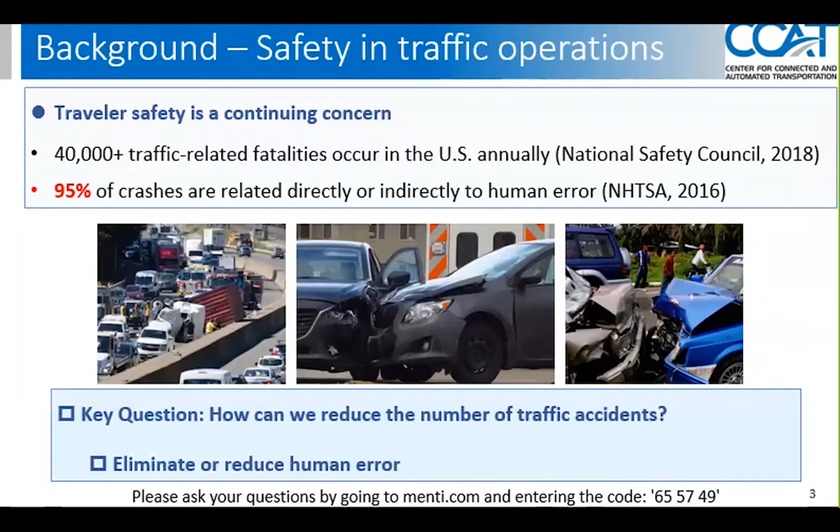Now, the question is, how do we reduce the number of crashes, or at least reduce their intensity? Well, just like I said, we can eliminate or reduce the errors that human beings make. That's one way. And if you're able to do this, then we are gearing towards something we call Vision Zero, an international initiative geared towards elimination of crashes. Some see it as a utopian goal, but at least it's a goal we can all work towards. And automation offers probably the most promising path towards Vision Zero.

Now, if I may expand a little bit on the mistakes that humans make, the causes of these mistakes are overconfidence. Many of us feel that we are good drivers, whereas we are not often as good as we think. We also have problems of distractions, especially among the youth - texting, music, and all that. Fatigue - sometimes we're just tired and we lose concentration. In some cases, it's driving under the influence of some substance or medication, and sometimes it's just slow reaction times, which again may be due to some human feelings or tiredness or some other reason. These are things that are difficult to avoid or reduce, but ultimately they translate into crashes.

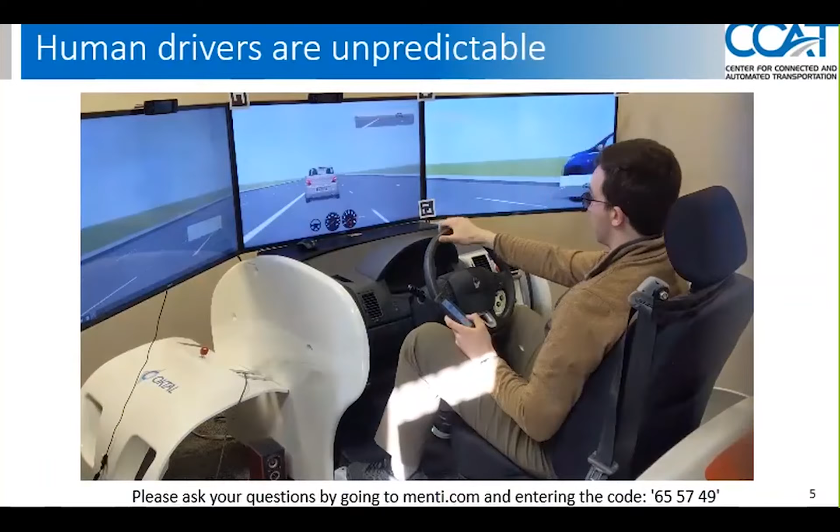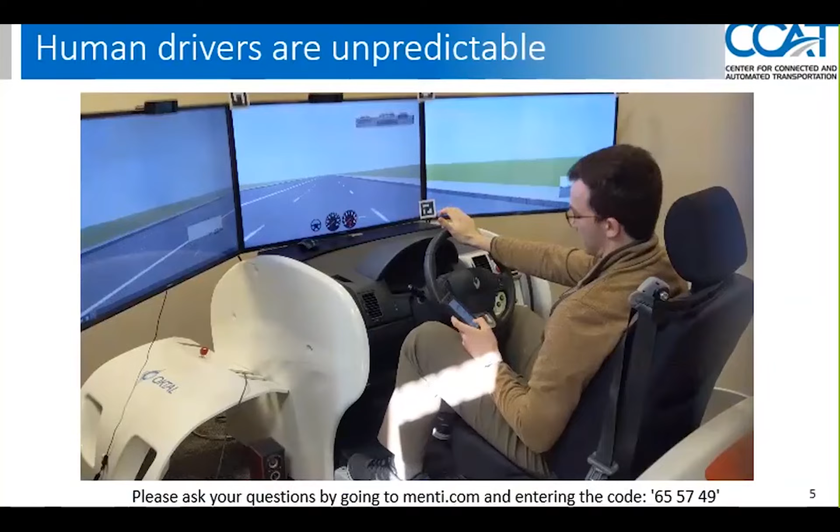But what you will see in the video, you will see an autonomous vehicle, a red car, that shares the traffic space with other vehicles. You will notice that the human-driven vehicle, the yellow car, suddenly enters the lane in front of the AV. It cuts in, and the AV decelerates in order to avoid rear-ending the HDV. But in doing so, the AV itself is rear-ended by the immediate following vehicle behind it. So this short video exemplifies a potential situation where two crash patterns could be experienced: side impact or side swipe, and the rear end.

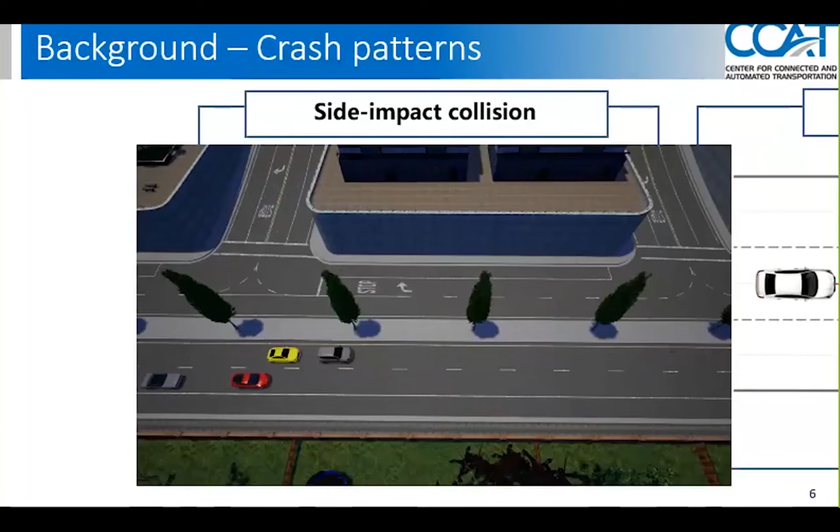So let's play the video. It's a very short clip, just a few seconds. So just play it and let's see. Yes, right there. So we are just playing it over and over again, so you can register the point. Okay, I think that's enough. Okay, so next slide.

Okay, so next, yes. So this is the second video, right? Okay, so I think the point is made.

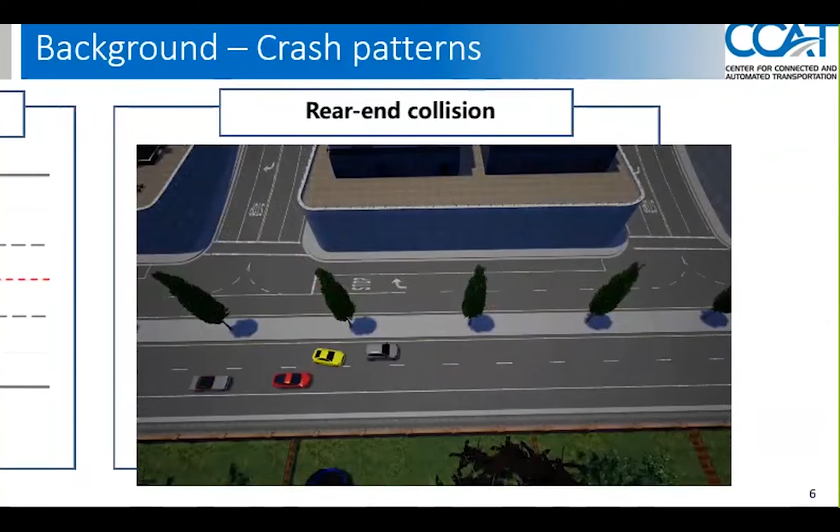Okay, so these short videos remind us of the potential traffic safety hazard, the risks that await us in the transition period, in the transition phase of AVs, where both the AVs and the HDVs, HDV meaning human-driven vehicle, share the traffic space, until a time when we have 100% market penetration. Well, it is not certain when we shall achieve that 100% market penetration. It's not even certain when we shall even start the AVs.

The AV sunrise, yes. Of course, we have AVs right now on test tracks and restricted environments and all that, but we're not really sure when it's going to be open for public use. It's possible that the start year may be different for different corridors or road classes, not the entire network at a time. So that's a possibility. But whatever the case, where we have mixed traffic, we'll have to contend with that heterogeneity of AVs and HDVs and their sibling rivalries and interactions. That's something we have to contend with.

So this will mean that the algorithms in the AV controller will need to be designed to make the AV proactive, very proactive, to mitigate the mistakes that the HDV drivers make and the bad habits of the surrounding HDVs in the vicinity. So this is a primary motivation of our research.

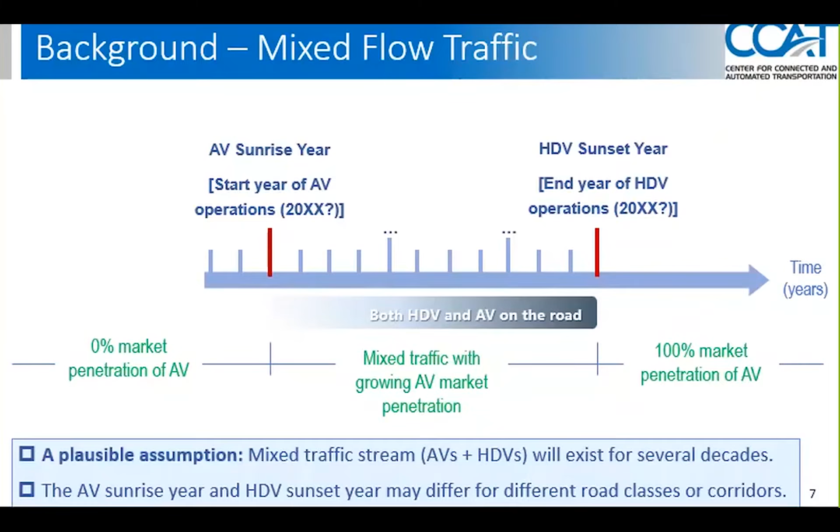Okay, thank you, Dr. Labi, for introducing our project background. As Dr. Labi mentioned, in the first few decades of autonomous vehicle deployment, there will be a mixed traffic of autonomous vehicle and human-driven vehicles on the street at the same time. So this means that human error will still exist in the traffic stream, while autonomous vehicles are indeed expected to reduce the number of crashes. There will still unfortunately be crashes there.

So in the mixed traffic, we believe that there will be two main perspectives of crashes that involve autonomous vehicles. The first one is when the autonomous vehicle is at fault. It's self-explanatory. Reasons like algorithm failure or mechanical issues can cause an autonomous vehicle to perform dangerously, and that may result in a crash. This is also a huge concern for autonomous vehicle developers and manufacturers. So naturally, it receives a lot of attention.

What we want to bring into discussion in this project is perspective 2, where the surrounding human-driven vehicles, or the HDVs, are at fault, but the AVs were unable to avoid the crash. These situations will exist when an autonomous vehicle cannot figure out a way to avoid a crash induced by human drivers.

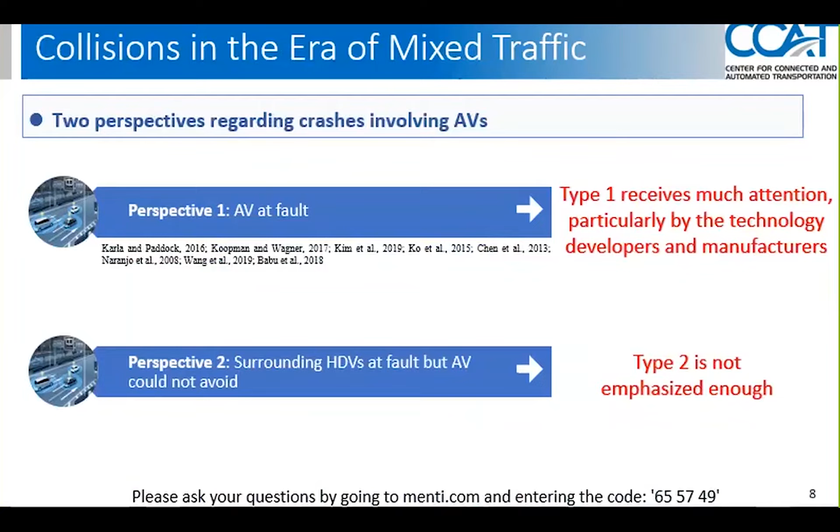In the remainder of this presentation, we will mainly focus on the perspective 2 collision and provide some thoughts on how we are going to address them.

We mentioned previously that emerging technology is expected to improve safety. One such technology is connectivity. To give a broad definition, it is the ability for vehicles to share and receive information from other vehicles and infrastructure. For a human driver sitting in a connected vehicle, connectivity will allow them to receive information regarding unsafe circumstances in advance, even without a clear line of sight.

However, connectivity with human drivers has some limitations. The most important limitation is that it really depends on the driver's compliance. The driver can choose not to do anything with the information, or maybe the driver simply cannot react to the information fast enough.

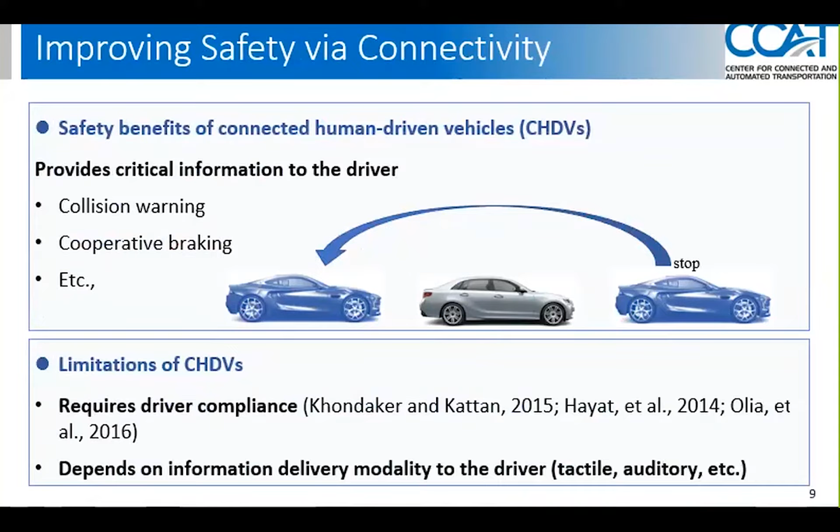Both of these may lead to a crash. Similarly, there could also be limitations regarding information delivery modality. Time-sensitive information, such as information directly related to a potential crash, should be delivered efficiently. Since a driver may also respond to various forms of information modalities in different ways, this difference could also cause some problems, for example, slow reactions.

Another emerging technology that can improve safety is vehicle automation. The effect of automation is quite straightforward. It directly removes human input and the associated human errors from the vehicle.

Engineers and scientists have been developing and enhancing technologies that could outperform human drivers in terms of accuracy, reliability, reaction speed, and so on. This includes advancements in sensor technologies such as LiDAR, radar, camera, and on the algorithm side, computer vision, object recognition, 3D reconstruction, motion planning, and so on in real time. With these technologies, vehicles, in terms of their own driving, will not be subjected to human errors.

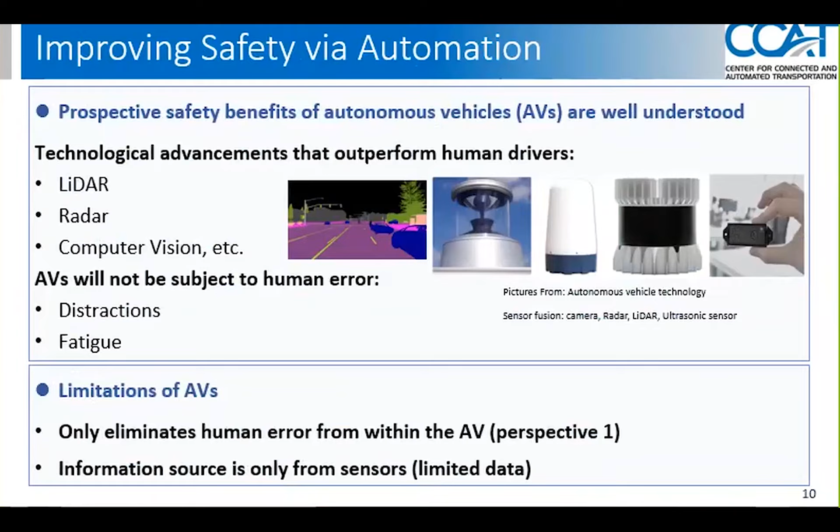But the limitation here is that this only eliminates human error from within the vehicle, as we discussed as perspective one, where the autonomous vehicle is at fault. However, if there is someone who wants to hit you, as we saw in one of the previous videos, where the driver made a sharp lane change without seeing you in his blind spot, there will still be a crash. In addition, if we only use sensors, there will always be data limitations.

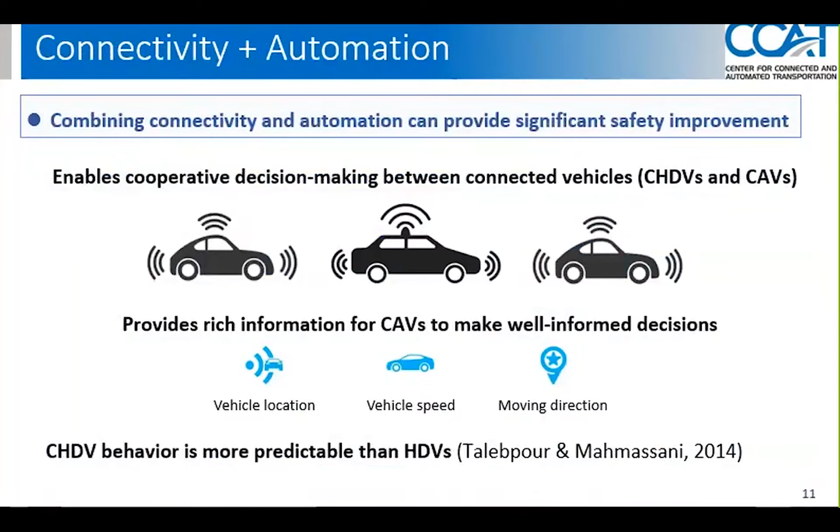Connectivity alone and automation alone have these limitations. We believe a system of CAVs and connected human-driven vehicles can address their limitations. This combination of both connectivity and automation will enable cooperative control between connected vehicles, meaning they will share information among each other and make well-informed cooperative decisions for their benefit as a whole system.

Specifically for roadway safety, since connected human-driven vehicles will be cooperative, the CAV will have more room to make a safe maneuver. If this maneuver is able to help avoid a crash, then everybody in this area will benefit. In order to realize this cooperative control, we will temporarily override the speed control of the surrounding connected and human-driven vehicles in crash-imminent situations.

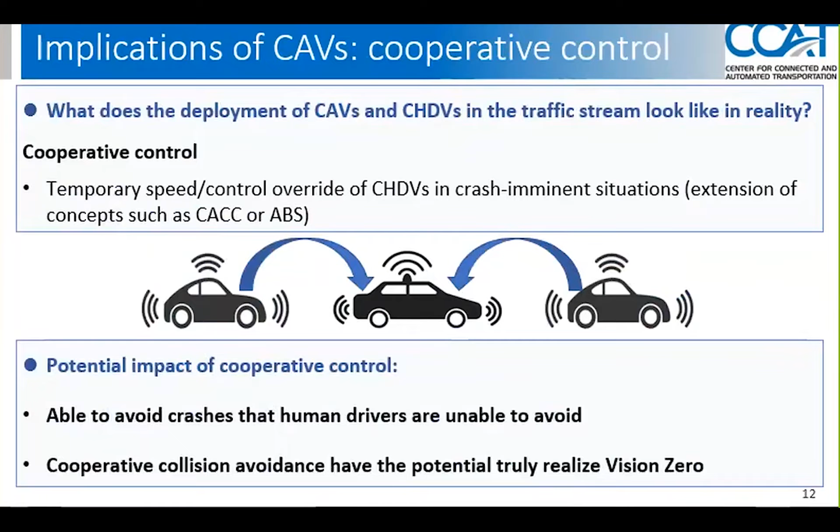This can be considered an extension of some existing concepts, such as cooperative adaptive cruise control, where the drivers do not really need to control their speed. By doing this, we will be able to avoid some crashes that human drivers are unable to avoid right now. So this will help contribute to the goal of Vision Zero, of zero fatalities.

Given the system of control, the purpose of this research project is to design and test approaches for CAVs to avoid crash-imminent situations through the use of both connectivity and automation.

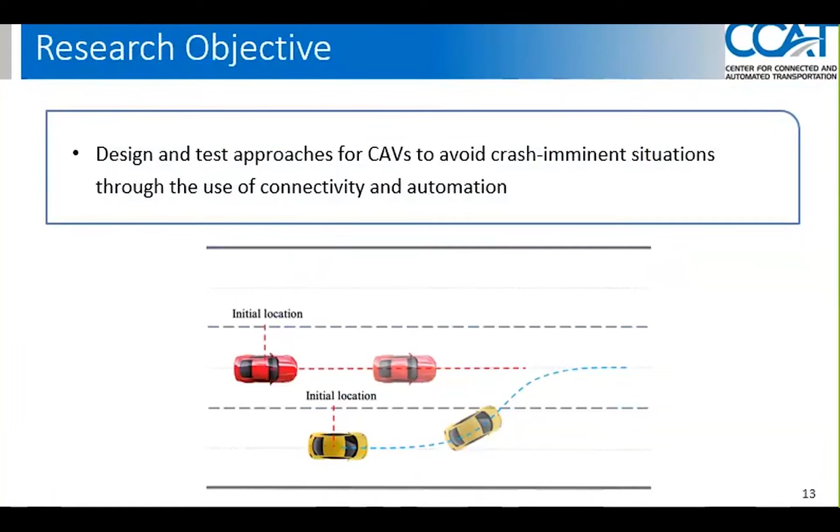Our first method that we will present here is a control-based approach. In general, control systems deal with the behavior of dynamical systems. The dynamics of the system serve as inputs of the controller, and the objective of the system is to perform your desired action. Here we can see in the figure a simple feedback system where the controller accounts for the desired output and the measured error to eventually stabilize the desired system's output.

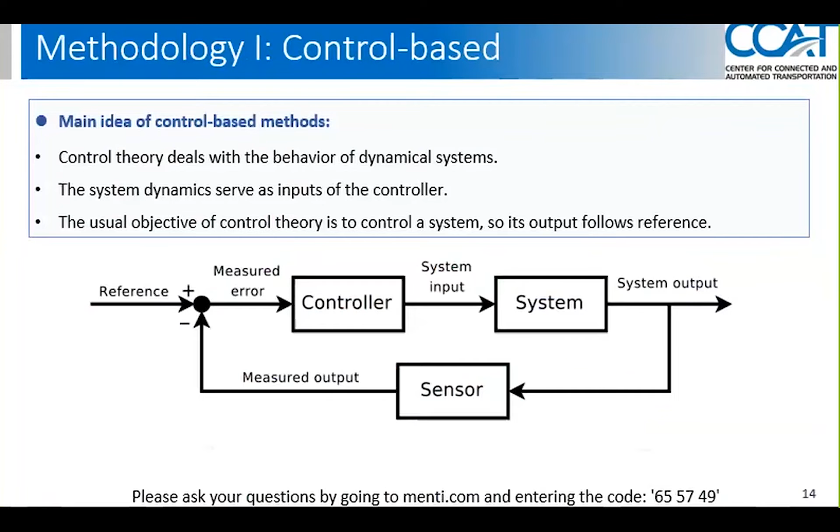With this in mind, we can now discuss the context of our system and the desired output of the system.

Our scenario is that there will be an aggressive driver who suddenly changed lanes into an autonomous vehicle's trajectory due to a driving error. In the following slides, the red vehicle will be connected and autonomous. The yellow vehicles are the aggressive lane-changing vehicles. The blue vehicles represent the cooperative connected and human-driven vehicles that help avoid the crash. The white vehicle is a non-connected vehicle, which in the literature people also call isolated HDVs.

For the control-based methodology, we will explore two maneuvers for the CAV to avoid a collision. The first is that the CAV will decelerate to allow the lane-changing vehicle to enter its lane. In this case, the connected vehicle driving behind the CAV will decelerate in cooperation with the CAV.

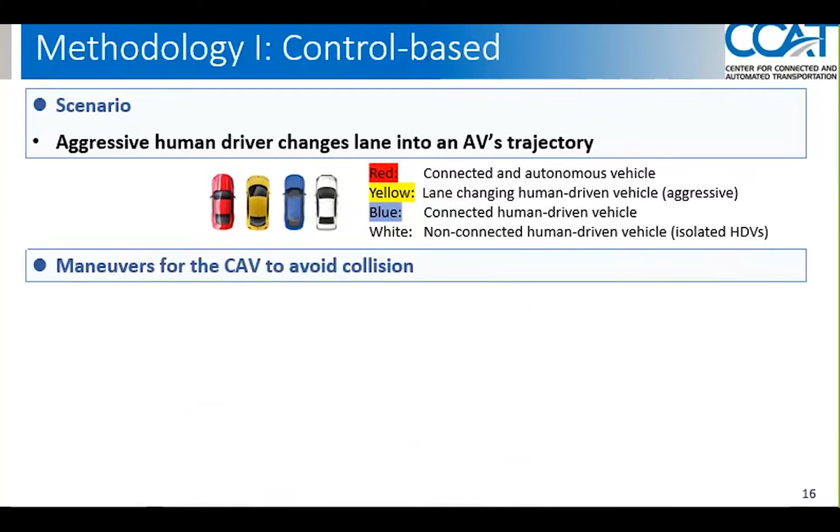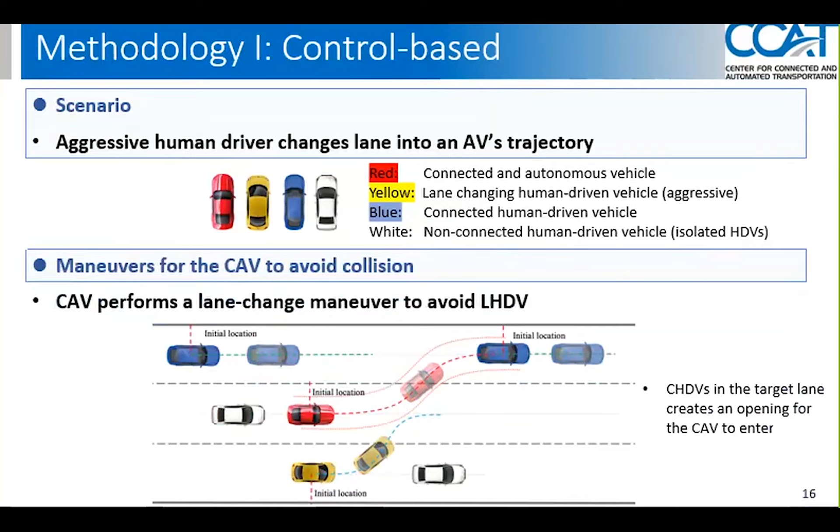The second maneuver is a bit more complicated compared to the first. As you can see from this figure, when the vehicle behind the CAV is a non-connected human-driven vehicle that follows pretty closely, if the CAV now takes a hard brake to avoid the hit from the yellow vehicle, there's a high chance that the white vehicle will run into the CAV and cause a rear-end collision. So in this case, our CAV will try to perform a lane-changing maneuver to avoid the yellow vehicle hitting it, and the blue connected vehicles in the target lane will try to create an opening for the CAV to enter.

The information that a CAV will have access to is the following. First, we will have the vehicle speed and position data in real time. For the connected vehicle, this information can be shared through connectivity, while for the aggressive human-driven vehicle that's changing lanes, we will need to rely on the sensors on board of the CAV.

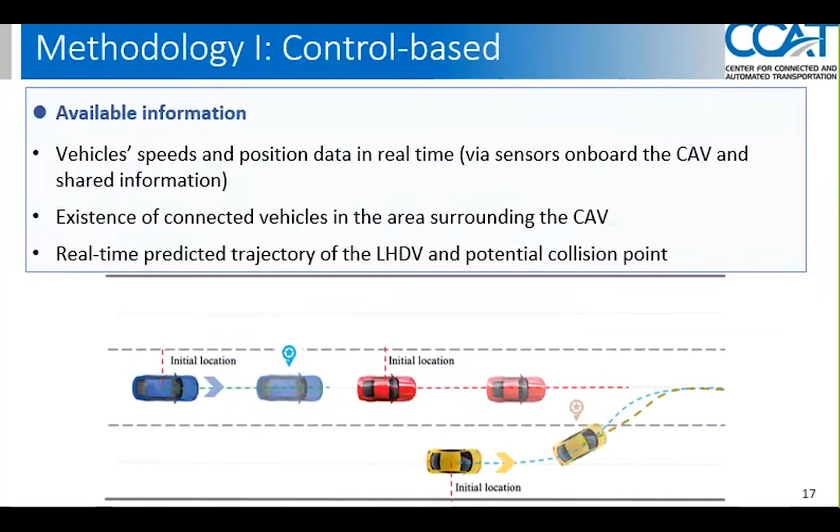Secondly, the CAV needs to know the distribution of the existence of the surrounding connected vehicles in its area, so the CAV can know in which direction there will be other vehicles able to help create more room for its safe maneuver. In addition, we will also need the real-time predicted trajectory for the aggressive lane-changing vehicle, so we can compute the potential collision point in real time and do path planning to avoid it.

Given this information, the CAV must determine the crash avoidance maneuver and calculate the input parameters to perform the maneuver. One thing to emphasize is that the whole process from determining the avoidance maneuver to executing it must be done quickly enough to actually avoid the crash, as there will be no benefit to figuring out how to dodge an incoming vehicle after the crash.

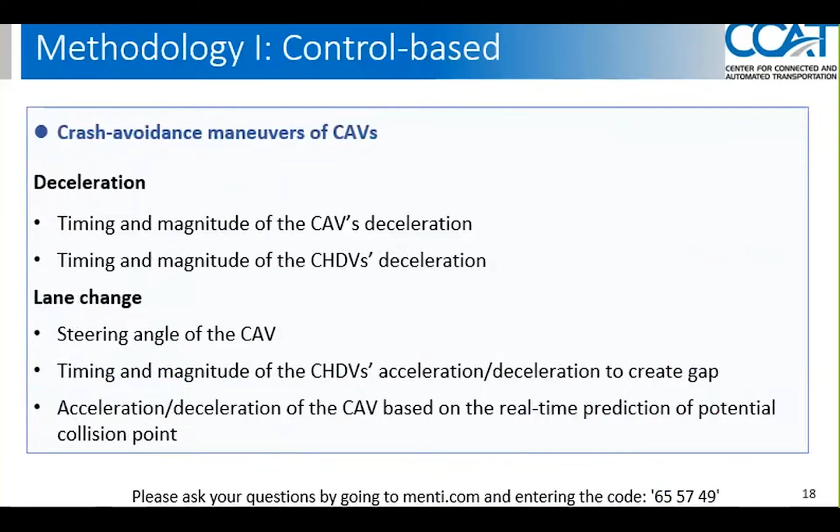This slide shows the general flow of our control framework. First, we will have a motion prediction component that predicts the trajectory and speed profile of the aggressive lane-changing vehicle. With this information describing the lane-changing vehicle's behavior, the framework will choose the appropriate maneuver to avoid the crash.

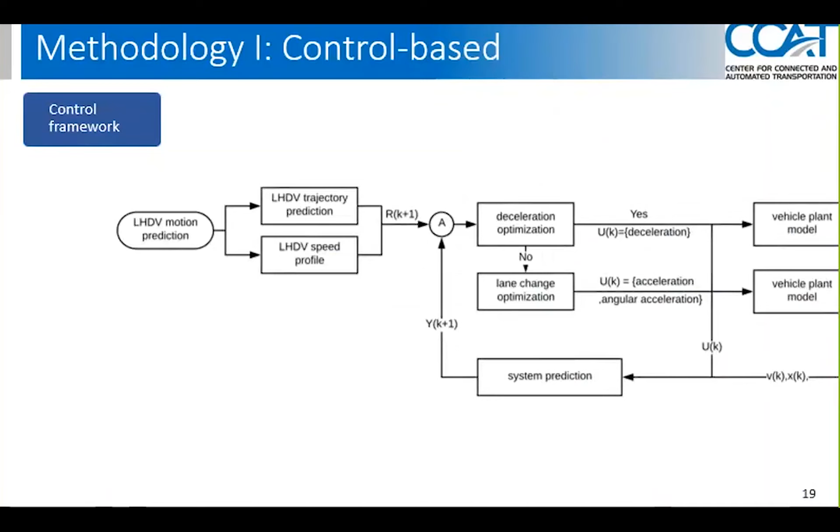After the crash avoidance maneuver is decided, we need to make sure that in the surrounding area, the CAVs and CHDVs will act cooperatively to dodge the hit.

There are some challenges that we need to pay attention to for the control framework. The first is robustness. Since we are talking about an aggressive driver whose behavior could be highly unpredictable, it can be expected that for the motion prediction part, there will be some error introduced, and we need to make sure that our framework is robust enough to deal with that.

The second thing is we need to pay attention to its stability. As crashes typically happen within seconds, we need to make sure that the control can be stabilized in that short amount of time.

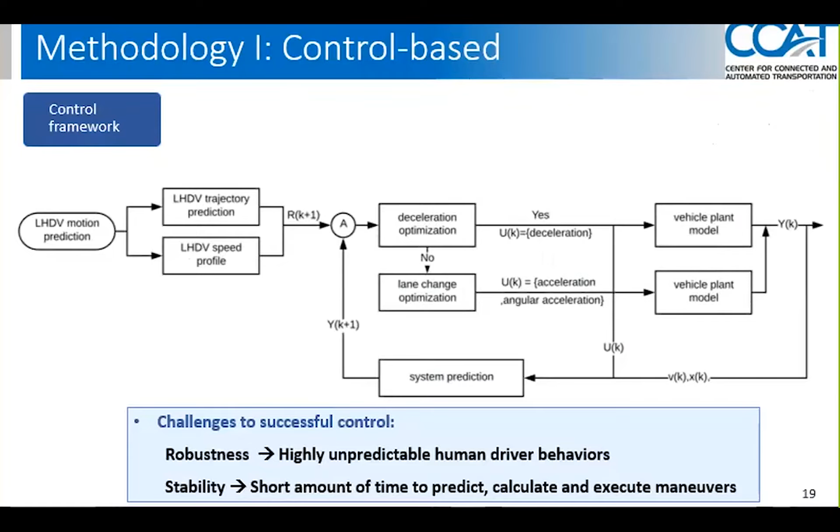The second approach we are considering in this study is a learning-based approach. In this project, we will explore reinforcement learning algorithms, which let the agents interact with an environment, creating a feedback loop of learning between the agent and the environment.

Our agents here are the connected and autonomous vehicle and the connected and human-driven vehicles. They will take a series of actions to explore the environment, and each time they take an action, they will be evaluated by a reward function telling them how well they are doing in terms of safety performance, and what state they will move into so they can take actions in the next steps.

The reason we want to explore reinforcement learning is that it does not require an explicit definition of crash patterns, and we also do not need to define the specific actions that the agents need to perform. This allows us to account for collision situations that are not predefined.

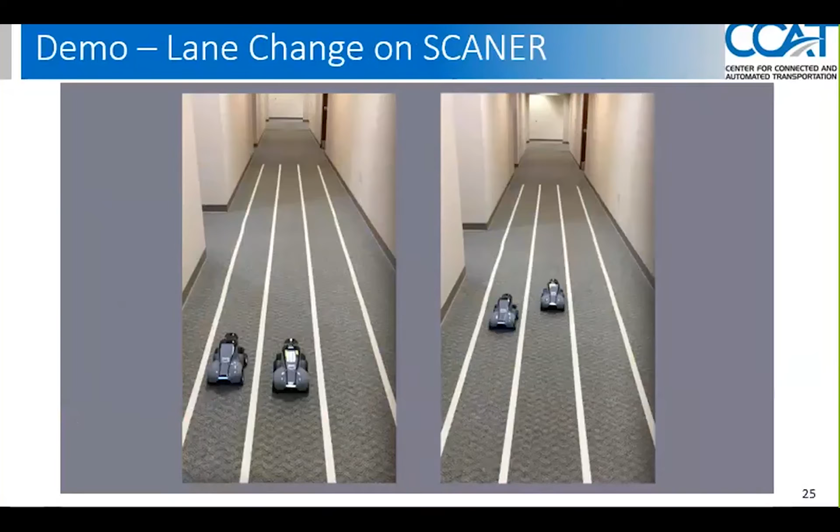Here is a phase 2 deployment in a controlled small-scale environment. It's actually the hallway near our office at the Purdue CCAT Center, where Amazon Web Service DeepRacer vehicles are used to demonstrate deceleration and lane changing maneuvers to dodge the potential hit. For now, we only have 2 DeepRacer vehicles shown in this video. We plan to increase the number of them to simulate more complicated real-world scenarios.

In this presentation, we started with the background introduction with emphasis on roadway safety. We discussed the mixed traffic flow in the transition period, where autonomous vehicles and human-driven vehicles are both on the street, and talked about two perspectives regarding crashes that involve autonomous vehicles. Then we discussed the concept of cooperative control for crash avoidance and introduced the control-based and learning-based crash avoidance frameworks. This project aligns with the US DOT's focus on CV technology deployment, for which we introduced the four phases of deployment.

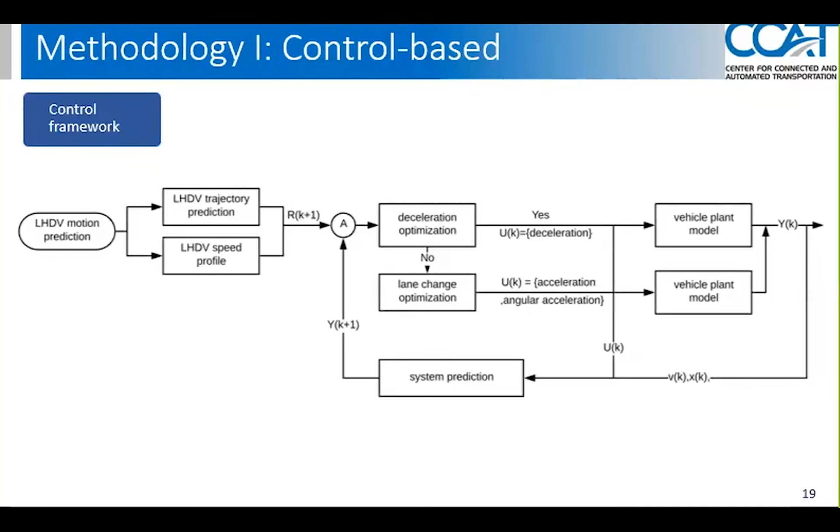But we are definitely gonna compare them in the future. Thank you for pointing that out. Actually, that's one of the motivations for our deployment, because it's only through deployment that we can tell which one works better. So that's a motivation, and that's one of the goals of our research, as stated in our research statement. So that's something we shall definitely be doing.

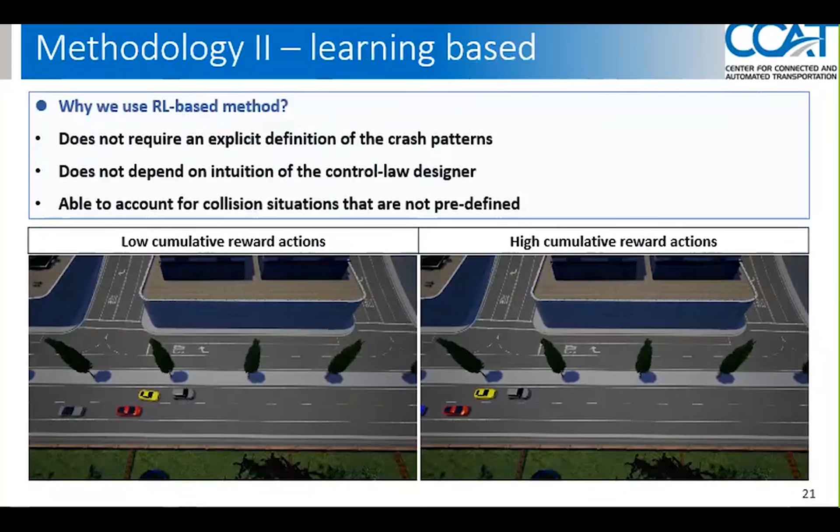Okay, the next question: will the solution require cloud connectivity, or can the necessary processing be accomplished on board the vehicle via edge computing? I think that is like a future goal. For now, we're only doing this in the simulation environment, but I guess in the future we will go into that area.

You want to see something? Yeah, all right. Okay, so Frank, one of the team members, is here to share. Come around, share his... you have to come around. The mic, right? Yeah, it shouldn't be much. Okay, alright, Frank, go ahead please.

So currently we consider reinforcement learning using very simple neural networks, not very deep. Our ultimate goal is to use tiny neural networks that can be embedded into edge devices and embedded into the vehicle itself, which doesn't need a high kind of computational power. So this is our future goal, but in the initial stage we consider this problem and want to address it from the beginning, so we choose to use simple kinds of neural networks instead of very deep ones. With the connectivity devices, we can get more accurate information without any kind of deep pre-processing. So this is also a contribution towards the simple neural network.